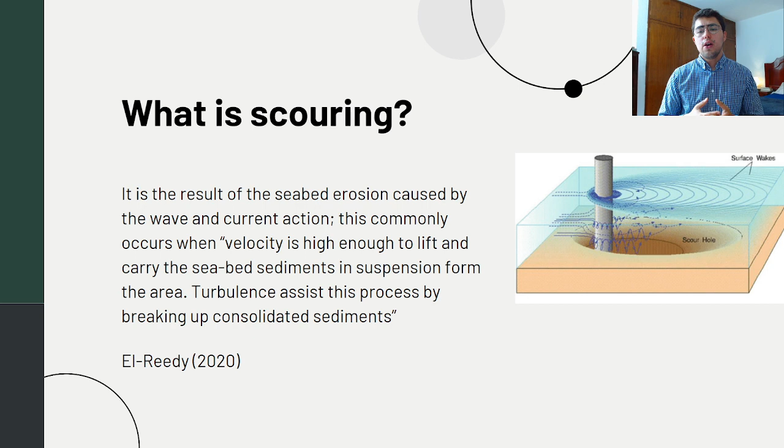So before I present the articles, I would like to explain what scouring is. Scouring is the result of seabed erosion caused by wave and current action. This commonly occurs when velocity is high enough to lift and carry the seabed sediments in suspension from the area. As you can see in the picture on your right, there is a scour hole. This will obviously affect the behavior of the pile.

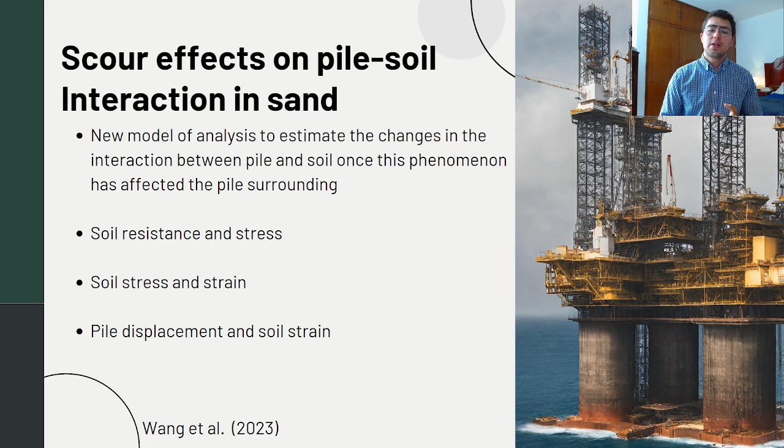So, the first article is Scour Effects on Pile-Soil Interaction in Sand, presented by Wang et al. They present a new model of analysis to estimate the changes in the interaction between pile and soil once this phenomenon has affected the pile surroundings. Usually P-Y curves are used, but they are not very accurate. So Wang et al. propose this model, considering soil resistance and stress, soil stress and strain, and pile displacement and soil strain.

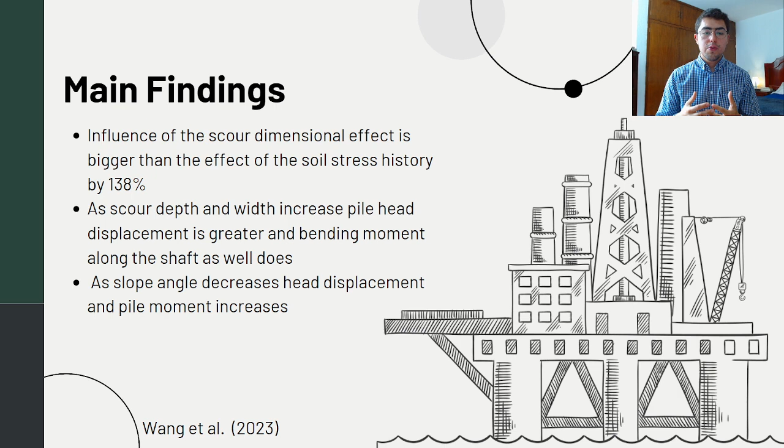The main finding of their model is that the influence of the scour dimensional effect is bigger than the effect of the soil stress history by 138%. Also, as the scour depth and width increase, pile head displacement is greater, and so is the bending moment along the shaft. And as the slope angle decreases, head displacement and pile moment increase.

The second article is Riprap Protection in Piles and Effect on Horizontal Bearing Capacity, presented by Yin et al. The finite element method and the finite element method back propagation neural network response surface methodology is the method they use to carry out their model. An 8 megawatt turbine located in the East China Sea is used as an example, and the scour depth conditions are restricted to the API specifications, which can take a maximum value of 1.5 times the diameter of the pile.

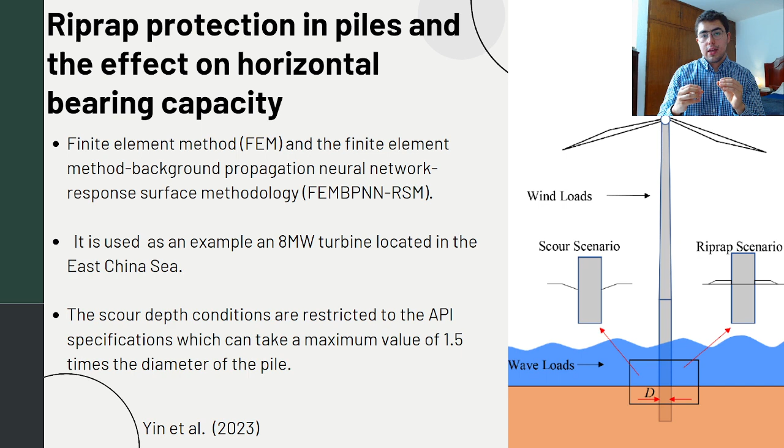Riprap protection is a solution which consists of a structure built at the base of the pile that has contact with the seabed. The main findings are that the computed results demonstrate that as scour depth increases, the probability of failure also does, but the reliability index decreases. Riprap protection considerably decreases the mudline rotational angle as its height increases. And riprap protection turns out to be a reliable alternative for reducing the probability of failure with confident reliability index results.

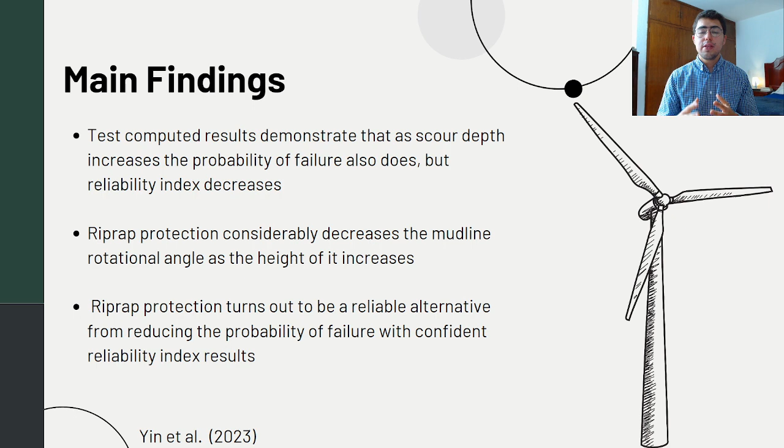The last article is also about a type of protection, in this case grouting protection against scouring. It was presented by Zhang et al. This experiment was conducted in a flume at the Ocean University of China. Pile A is protected with a cement sodium silicate grouting material, and pile B is left without any type of protection, in order to compare how the pile would behave without protection and with grouting protection. For pile A, a high-pressure jet grouting system was designed, and geometric, kinematic, and dynamic similarity were considered in this experiment.

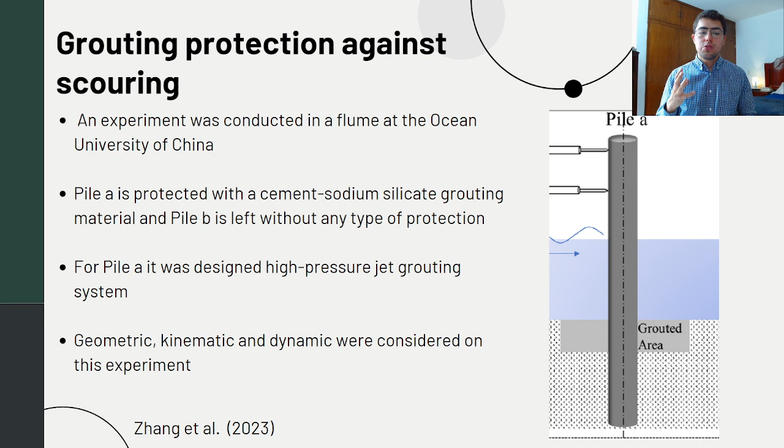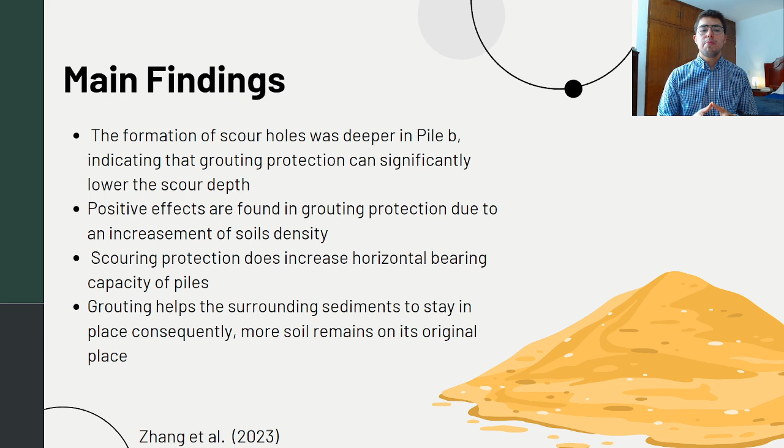The main findings were that the formation of scour holes was deeper in pile B, indicating that grouting protection can significantly lower the scour depth. Positive effects are found in grouting protection due to an increase of the soil's density. Scouring protection does increase the horizontal bearing capacity of piles, and grouting helps the surrounding sediments stay in place. Consequently, more soil remains in its original place.

Well, the first conclusion from these three articles is that curves obtained from fundamental principles are necessary for more reliable calculation and simulation of piles under scouring effects. This means that P-Y curves are a first approach to understanding the displacement of a pile. These graphs are usually done considering the type of soil, but they are not very accurate. So this type of new model provides a more realistic approach to the behavior of the pile. So I think it's very relevant to apply this in future projects.

Also, scouring does have an impact on bearing capacity and increases deflection. From the three articles that I analyzed, all three have solid evidence about the negative effects of scouring: they increase the displacement of the pile, reduce its horizontal bearing capacity, and overall they do affect the piles. And both riprap and grouting protection are effective methods to considerably prevent scouring and increase pile resistance. The effectiveness of protection against scouring is demonstrated, but specific modeling and work must be carried out in order to design in different locations.